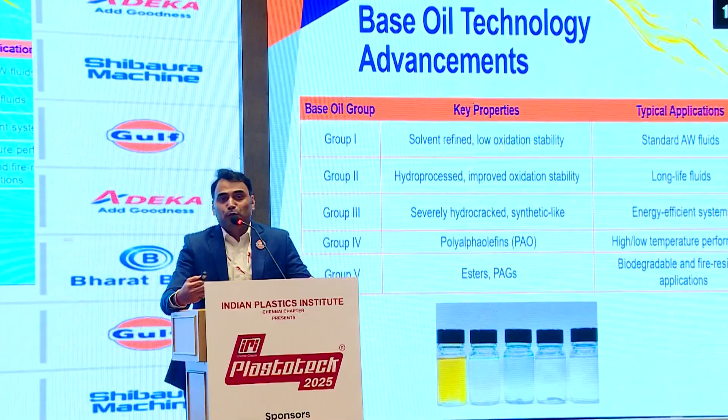If we are talking about base oil technology advancement, as I said, the initial phase used Group 1 base oil, which is solvent refined, a basic kind of oil with standard anti-wear properties. In Group 2, by the hydrocracking process, Group 1 is further refined and hydroprocessed, which improves oxidation stability. So it is more resistant to oxygen and slowly deteriorates through reaction with oxygen. It is a long life fluid.

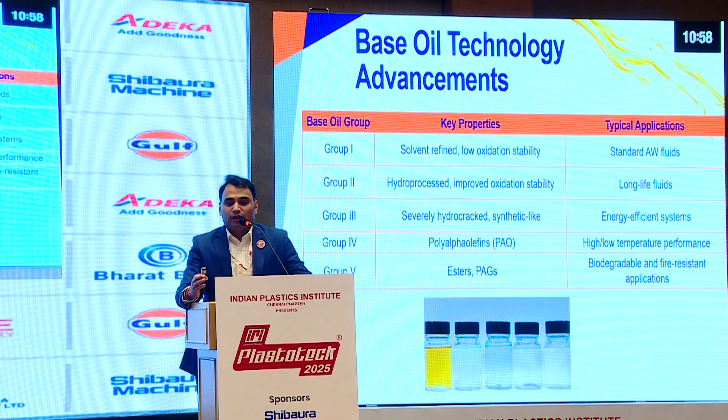Further, Group 3 was introduced, which is severely hydrocracked, a further hydroprocessing. So it is clearer in color, more energy efficient, a more refined product. Then Group 4 and Group 5 are basically synthetic oils, used for high-end applications, longer life, energy efficiency. You can see in the picture all the groups; as the group increases, the clarity or appearance of the oil becomes crystal clear.

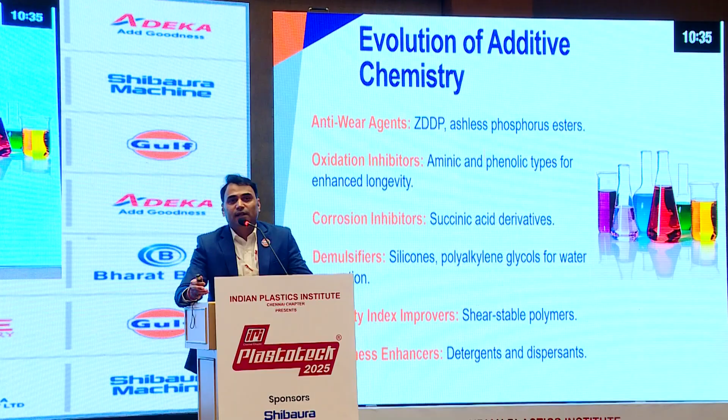Evolution of the additives also. As the oil evolved, additive technologies also evolved. Initially anti-wear agents were used, and even today anti-wear agents are used, but in a different form. In earlier days it was a zinc-based anti-wear which protected components from wear and tear. But nowadays ashless, or zinc-free, products are used, which are more environmentally friendly.

Oxidation inhibitors are basically additives which give longer life, an anti-aging product. It's an antioxidant which reduces oxidation of the product, the reaction with oxygen. Another one is corrosion inhibitors, which help reduce rusting and corrosion in the system. Demulsifiers work as additives which separate the water from the oil. In this additive technology, earlier silicone derivatives were used. Now polyalkylene glycols or other advanced additives are being used.

Viscosity improvers basically increase the viscosity index, so the oil can sustain temperature variation; the viscosity will not change with changes in temperature, on the higher or lower side. Cleanliness enhancers basically act as a detergent, keeping the components, machine parts and the oil clean. It carries all the dust or contamination to the filter, so filterability is increased.

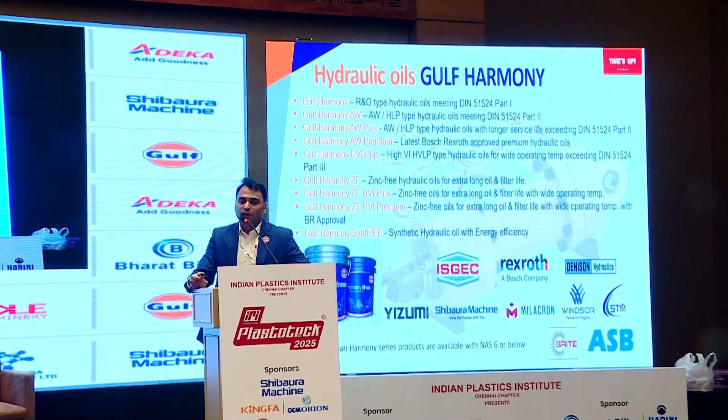So this is our hydraulic range. We have multiple products for each and every application. We have AW products, Gulf Harmony AW Plus, which is an HLP kind of product, and the Gulf Harmony AW Premium range. So we have a lot of products. We have zinc-free products. We have Harmony Synth EE, which is a synthetic oil which gives you energy efficiency in your injection molding machines. And these are some OEMs we are dealing with, which have approved our products in their machinery.

And we are not only an oil supplier, we also give you the solutions and services. In short, I'll just give you a brief of services. We also take care of our customers. We do the root cause analysis. If they have any issue, they can register the complaint online. On the same day, we can approach the customer. It's an online portal basically where the customer can register their complaint, and we will resolve as soon as possible.

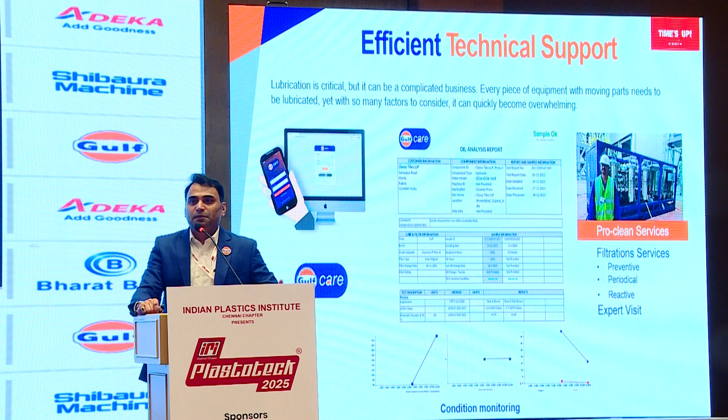We also do the condition monitoring for our customers. We check the condition of equipments. We make a report, and we have a portal for that also. So customer can give the report, and as soon as possible we can send them the digital reports also. We also do the filtration services for customers. We do the lubrication audit at the customer end, which helps the predictive maintenance part. We also help the customers. And we also arrange the application expert visits on the requirement of the customer to resolve their ongoing issues.

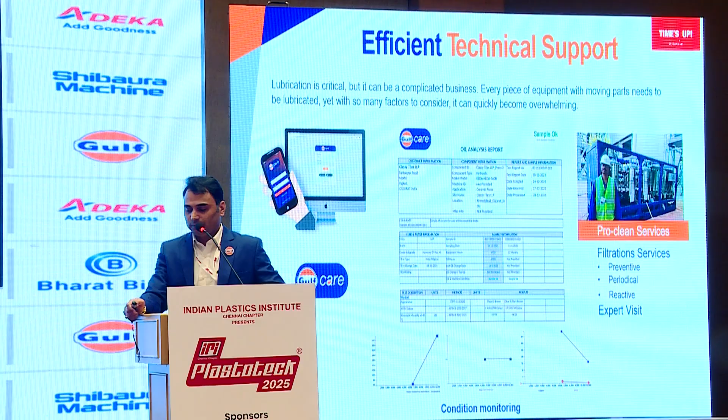Gulf Oil offering to the industry. So basically, we have a complete range of products, not only in the hydraulic oil, in the other segments also. Gulf gear oils, compressor oils, greases. We have a big range of greases. So we have all the product range. We have our distributor network, which can easily access any place or any location, remote location also we can supply.

We have field technical services, and also we have 2 labs. One is in Chennai and one is in Silvassa. So it's a world-class lab. We have an R&D center also here in India, which supports the global R&D center in the other country also.

So for the key takeaway notes, just 3 things to maintain a good machine or a good hydraulic system. Basically, you have to keep it as dry as possible. Make sure that the water contamination should be less than 500 ppm. You have to keep it as cool as possible. Your machine should be cool, below 55 degrees. So it is always helpful for a hydraulic oil if the temperature is maintained within 55 or 50 degrees. And the third is always keep your system or machine clean.

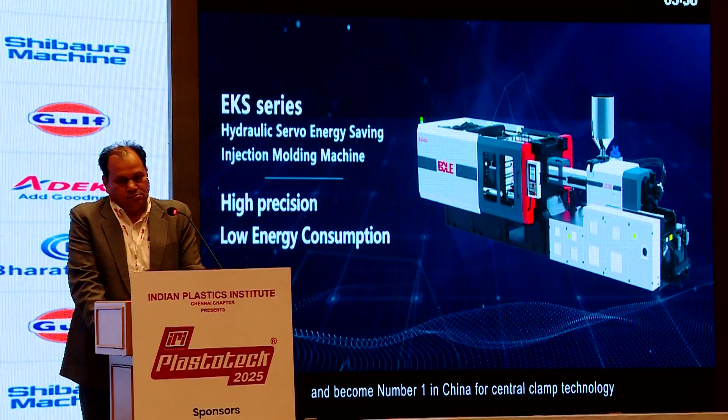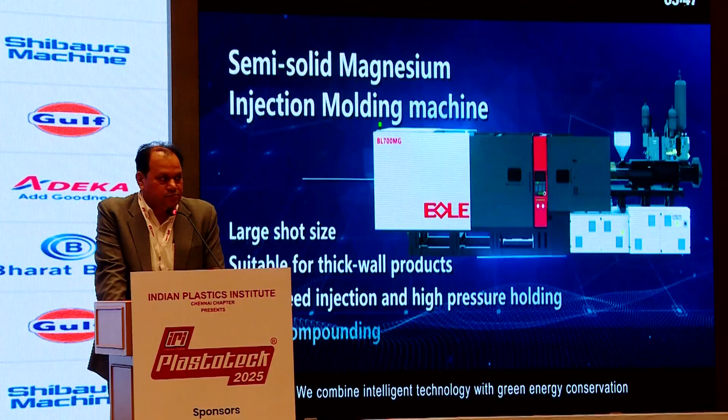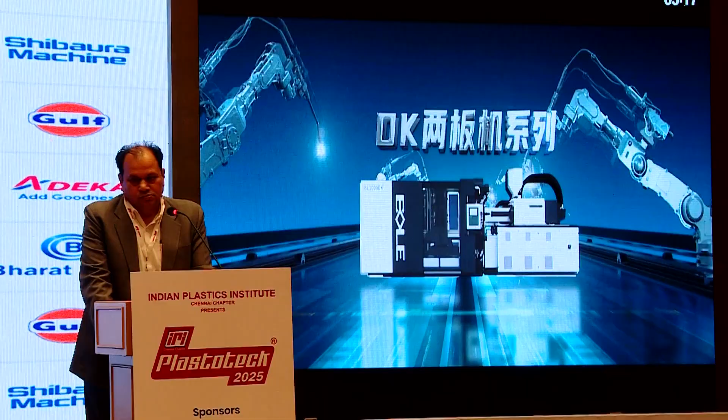2 decades of development and continuous acceleration have made Bole master cutting-edge injection molding technology, and European quality made in China has become a reality. With 2 firsts in the world and 5 firsts in China, Bole is the injection molding industry leader. We have 4 production lines and more than 300 product models that meet clients' one-stop needs.

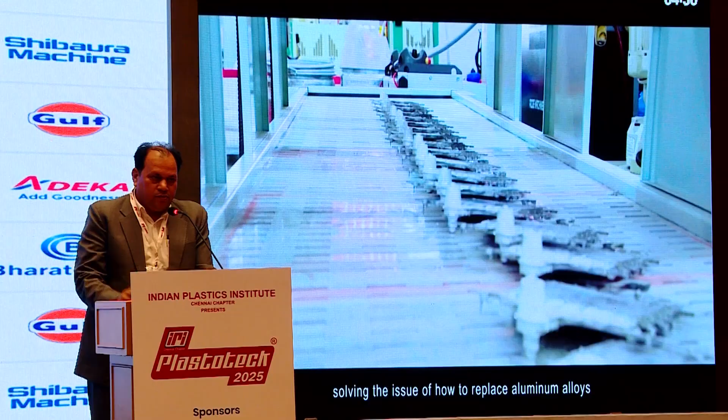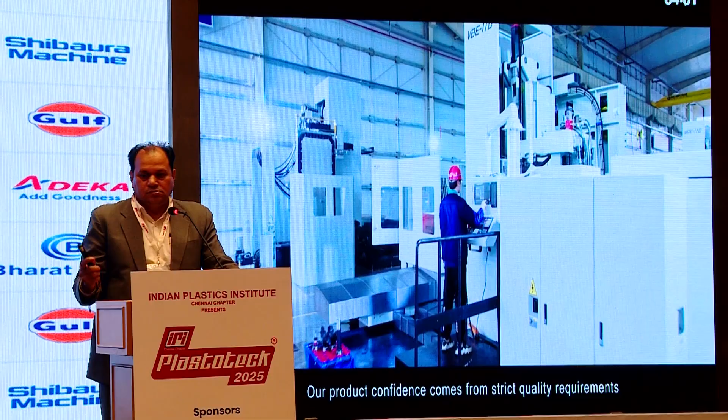In making multi-color plastic parts for automotive interiors and car lights. Our product confidence comes from strict quality requirements, from research to design, production to testing, and customization to delivery. It's supported by countless reliability tests, and the pursuit of product excellence by our hundreds of R&D personnel at home and abroad. Relying on our accumulations in the industry, we have upgraded our brand continuously. The Bole Intelligent Machinery brand becomes a strategic partner of Gree, Haier, Mercedes-Benz, Geely, NIO, and other well-known companies.

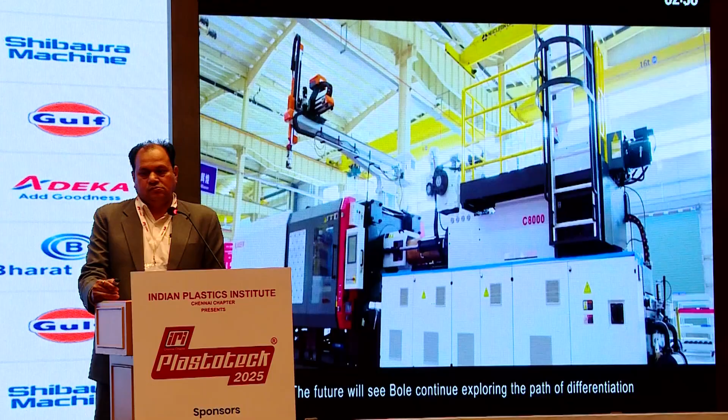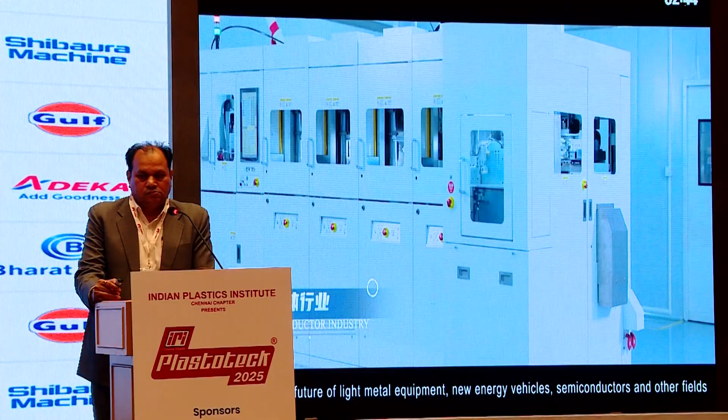Our sales network spans 73 countries. We have offices in Europe, the United States, India, Korea, and Vietnam to unlock our potential constantly. With international standards as our benchmark, we have won the trust of global clients and built global business territories. The future will see Bole continue exploring the path of differentiation, driving development with a new vision and leading the future of light metal equipment, new energy vehicles, semiconductors, and other fields with intelligent manufacturing. Bole is forging the backbone of China and unleashing the strength of China. Bole, driven through innovation.

Now you can change. Very less time left, but I'll take some more time to cover it fast. I'll tell you why I'm taking time. Some new technology which is already in the world, Bole India has taken this, and we are here to offer it to you. So we want at least that knowledge to go across, in depth. Anybody who has any requirements, we'll discuss separately. We can come to them and meet one-to-one. Yeah, you can start the slides, please.

Yeah, this one, okay. This EKS hydraulic servo system is advanced servo hydraulic machines where a bushless tie bar is there, then LM guide is on clamp and injection. Second thing on the footprint part, the clamp cylinder is inside the toggle. That is another advantage, so less of your space is taken over. Then wide platen toggle machines we are giving in India now, where tie bar distance and others will be more.

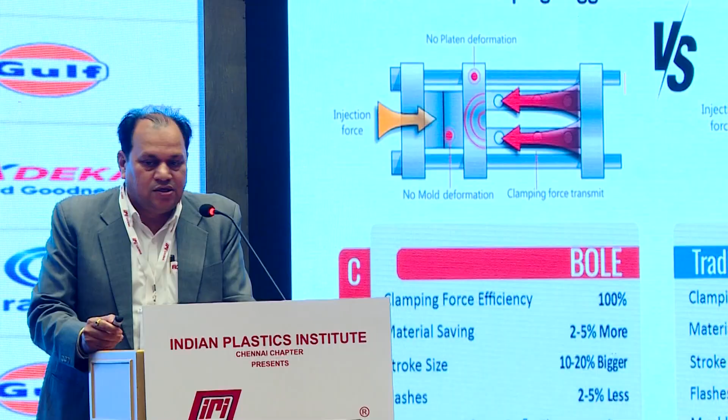Then multicolor and multi-component. This is the advantage of the Bole central toggle. Our toggle force supply is in the center of the mold, and injection is also in the center. So there will be very less chances of getting flash and deformation. Shot consistency, we write that mold wear and tear and platen deflection is very less. Flashes are less. Even material saving can be improved over the traditional clamping toggle system.

This is a special introduction for India. Just I am going fast because shot tolerance is less than 0.2%. This is the tie bar distance. It is the opening stroke. If you see vis-a-vis our competitors, we are slightly higher. This is the tie bar distance also. For example, 300 ton 705. I'll just go through fast. This 530 ton. Again, if you see daylight, it is higher because of central toggle clamping. The toggle gets open outside.

There is one thing which is a need of industry today, that you can control your machine sitting in your office. Even if your technical man is outside, he can talk with the operator and can set the machine parameters. All data you can get sitting anywhere. This is a good thing which is coming up. Many of our customers in the North are taking these options.

Then this is a new introduction which I told, 600 sets of machines have been sold to one customer, and in India we have sold I think 40 machines. Close to 40 we have already done. Now an automotive company, Hero Group, has just recently taken 10 machines of this series. This is a hybrid machine where plasticizing is all electric, and the rest of the functions we have optimized. This consumes 30% less power than any servo machines.

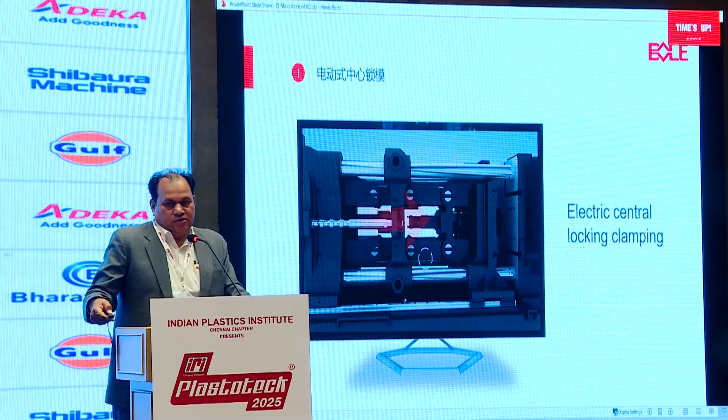Then ceramic and metal injection molding machines. Then a special machine for 5G mobile phone cells. We even offer customers special machines based on their product. For example, dustbin we are making. This is electrical, how the toggle is operating, you can see. Electrical clamping. The central locking is an advantage. You get more opening and stroke. This LM guide, platen supported by LM guide, where frictional resistance is very less during the platen movement. So less power consumption.

Then again, we have these encapsulated ball screw structures. No need of giving lubrication, where others are giving it. Just going through fast. Built-in servo hydraulic pump stations by us. Energy drive, what we say is servo machines. Energy yield is 0.69, there is a calculation we have. Whereas with our hybrid machines that we are offering it is 0.93. So maximum energy yield goes. Mr. Natarajan talked more about the yield for growth and profit. So this profit is there.

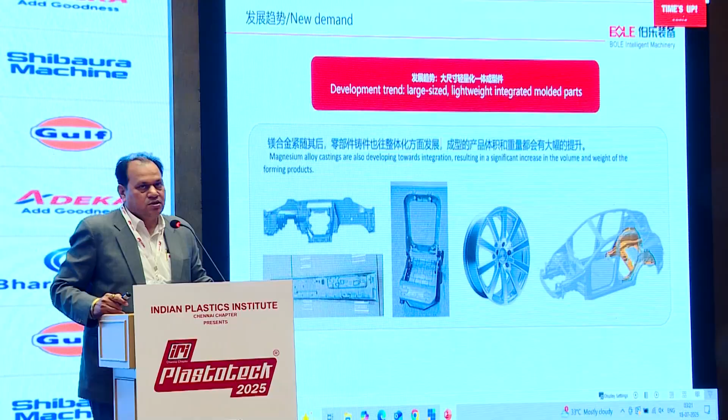These are the products, large size products. Let's start. These are the products. Does anybody want any detailed presentation of this? We would definitely like to come to you and give a one-to-one presentation, project cost, everything we have.

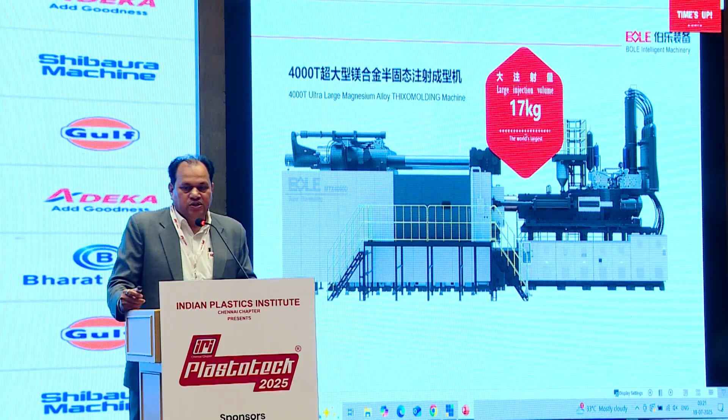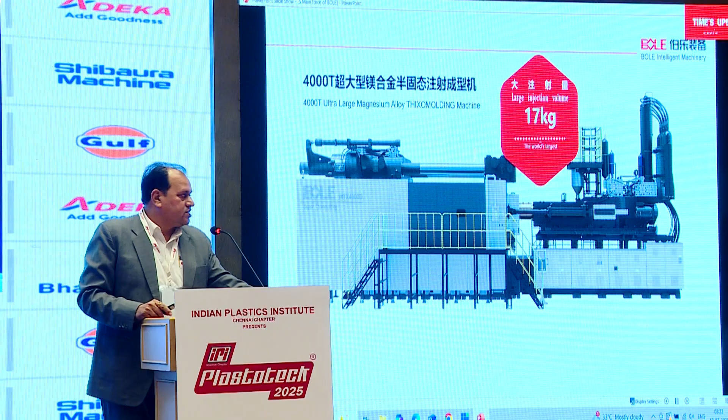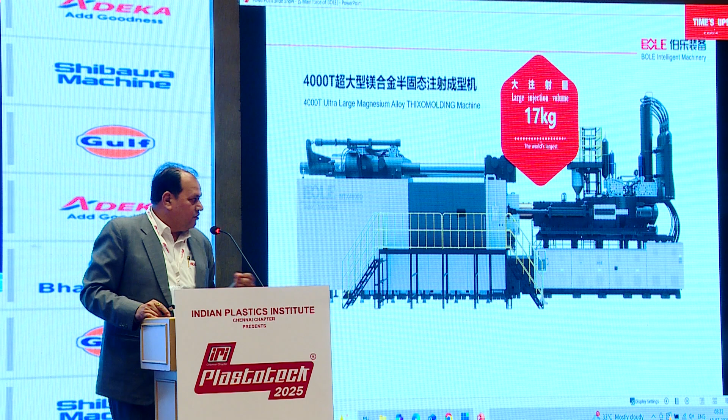This we call lightweight solutions. This is a machine, 4,000 ton, where 17 kg of shot capacity molding is there. There's a video here but due to less time I won't be able to show you. In this machine, the injection speed we have is up to 6,000 mm per second. Normal injection molding machines have 100-150 mm per second, and die casting machines have up to 250-300 mm per second. Because here we have to inject the metal, it has to go very fast - very special design of screw, barrel, everything.

One part I showed is the alloy wheel. For the other part, if you want, I can show - I have all the video, I can take it. Yeah, I know this. That's why I curtailed more than 100 slides.

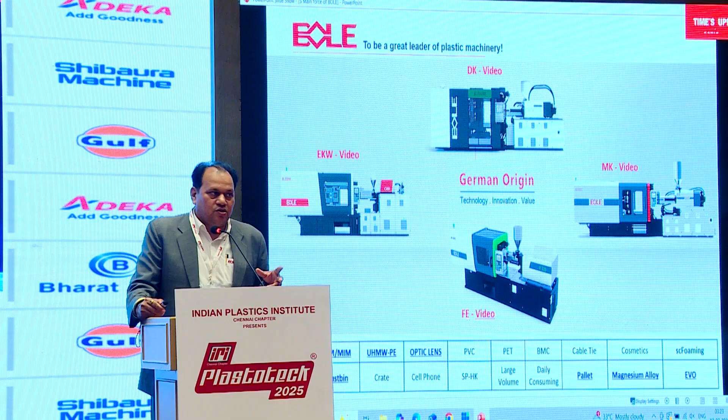So I'm just about closing it fast. I'm just giving a glimpse of what Bole India technology has here in the country, and we are proud to say this here in Bole India - at least the world's latest technology available in the globe is available in Ahmedabad. If you have any question regarding molding plastics, just give us a call, we will give you the solutions.

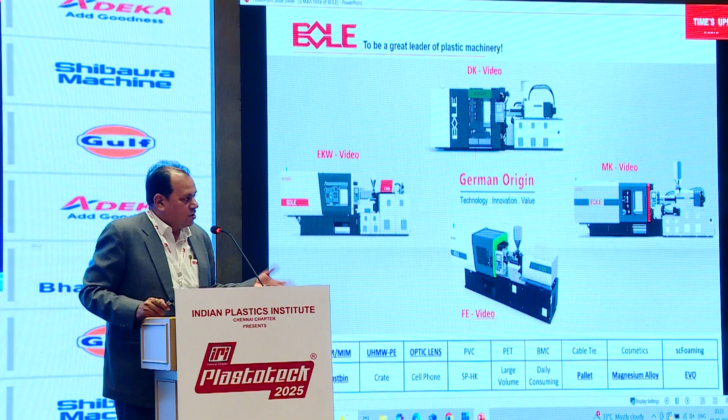These are 4 different models, different applications. For example, if I talk about a dustbin - a 240-liter dustbin we can make in an 1850 ton injection molding machine. None of our competitors can do so; they are doing it in 2400 ton. So your investment cost itself is saved. We give turnkey projects for everything, and 100% of the dustbin is made with recycled plastics.

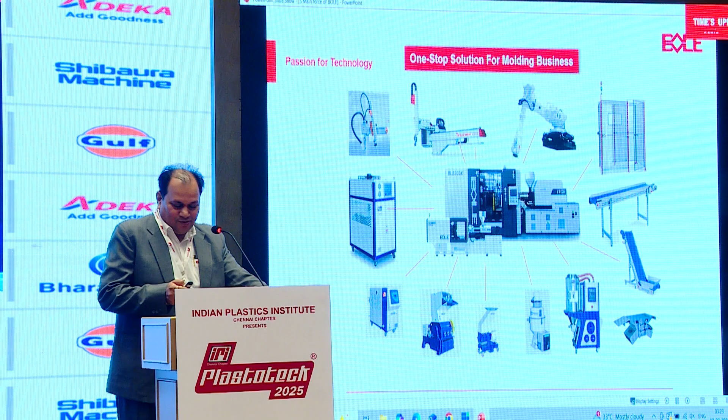There is a one-stop solution for the molding business - this is what we are going to do. And I am closing it now. So any questions later on we can handle. Thank you very much for giving your time - extra time I took, so special thanks to IPI for being with me.

Thank you, Panditji and Tiwariji. It was an excellent introduction of how, from working in a company, taking over it and expanding to such a level - it's really great. Questions for this presentation?

Thanks for the excellent presentation. Just want to know what kind of injection molding machine is the EVO series?

EVO series. Yes, EVO series. Hybrid power. Hybrid power.

Myself, Uday Kumar from R&D. Can we have...